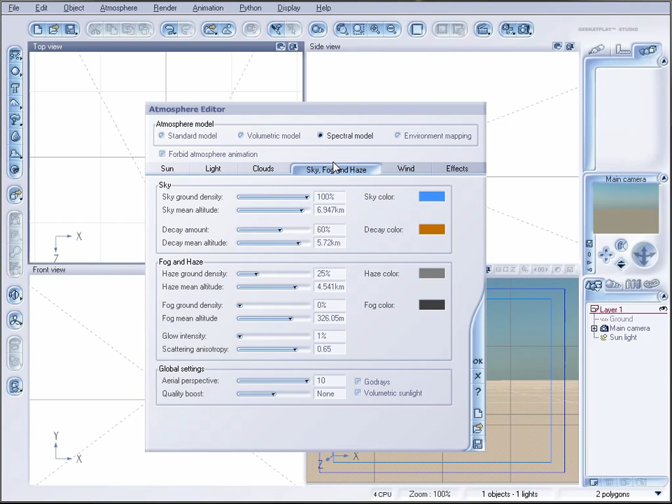In this tutorial we'll look at how to create some nice skies and mostly how to use God rays in creating your skies. This option was available in Vue with the spectral model. If you're using any other model, you won't see these options or the God ray enable checkbox right here. So if you want to use this, switch to the spectral model.

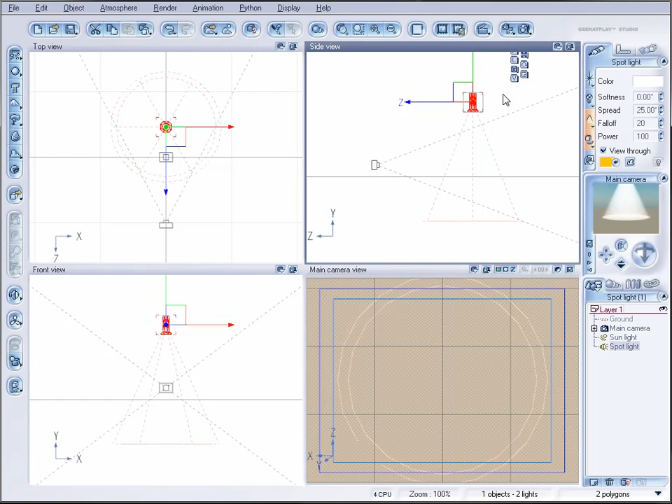What it actually does is apply volumetric lights from the sun, so you can see lines going, similar to what we've seen before. If we create one light spot right here and enable volumetric light, you can see the cone of light coming from this light. Similar technology is used applying directional light from the sun, and all the environment affects this light too.

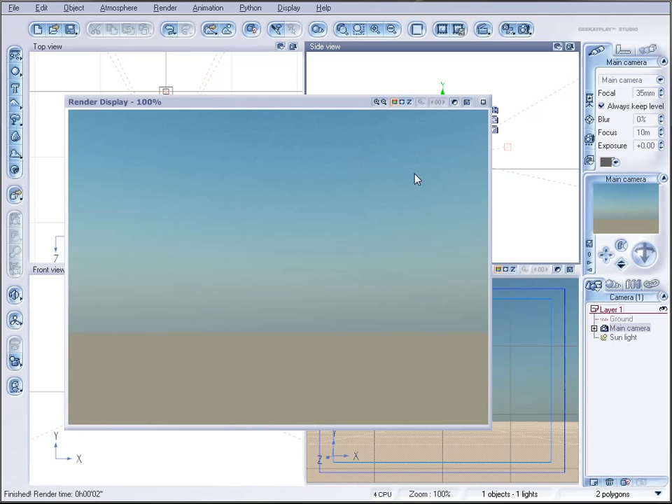Let's move our camera slightly up so we can see more sky. If we render right now, this is our normal sky. Now we'll go to the atmosphere editor and enable God rays. Let's render right now - you don't see any difference, because it applies to all the sky and we cannot see the difference between where the sky is covered or not.

To make them visible, we need to add clouds. You can select any cloud, update them, place these guys, and now if you render you can see some effect, but they're hardly visible because we need to increase contrast.

Here's a couple interesting tips. Let's add one sky and load clouds - I'll try to find one so I can show you. The one thing you want to be sure of is having shadow density enabled, which will add the effect. To do this, double click or right click on your window where you have clouds, select edit, and check the cast shadows box, so you can see how it's already affecting our preview.

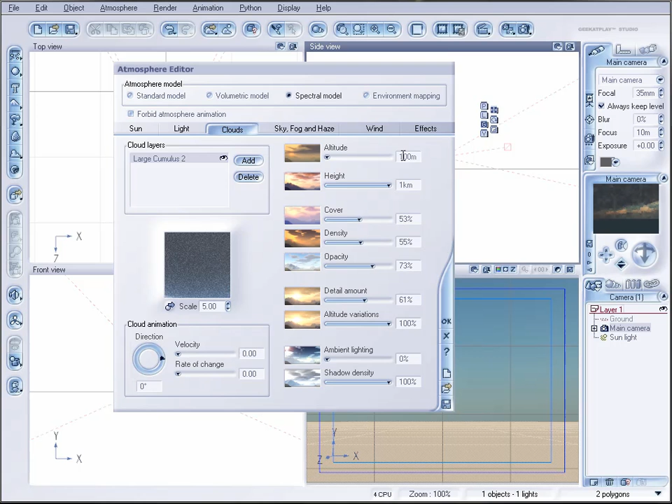Also, increasing the amount of cover if you need it, and altitude will affect things too. Mostly what altitude affects is how long the streak will be from a given location. For example, if we go look again at the atmosphere editor and we see 100 meters, our lights will go from 100 meters to the ground.

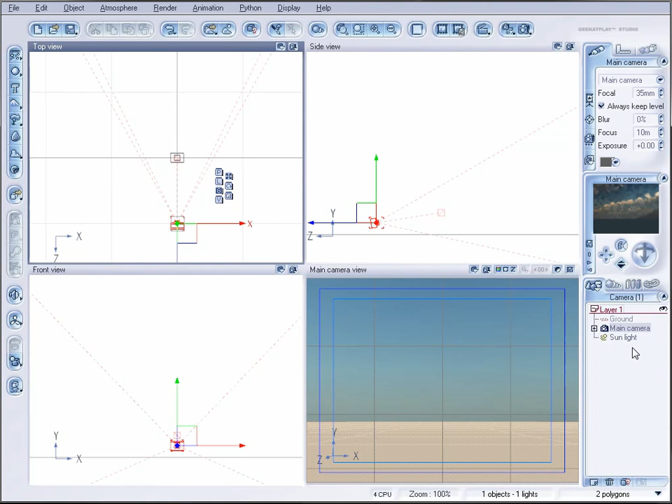If you want a longer strike, you need to increase it, go a little bit higher. If you do this, you will see the light strikes, but they're not very big or very wowy or nice looking. Here's a couple things to make them look better.

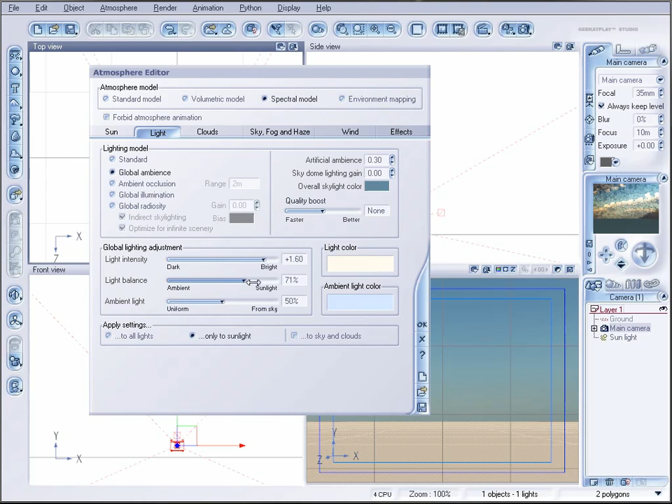One, go to the atmosphere lighting tab and increase light intensity - that will increase overall lights, but it also adds to the sunlight, and the strikes become much more visible. Be sure if you do this, you adjust your ambient light or others, so you won't have it overwhelmed with the lighting on your model.

Also, you can decrease ambient light just slightly, so our clouds will pop up even darker. And if you have darker clouds, comparing the contrast, you can see the streaks a little bit better.

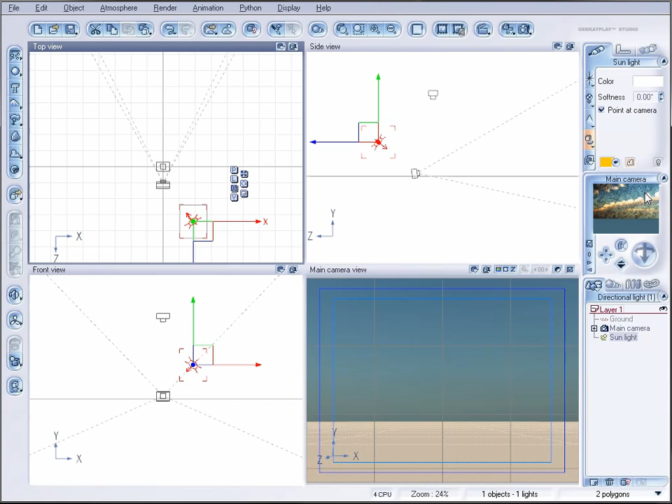Other things also - position of the sun matters. If the sun is going behind the camera, you can still see the strikes, but they're not as impressive as if you take it from the camera and move maybe to the side of the camera, a little up and to the front. In this case you'll have lights going more visible and they'll give you a better effect.

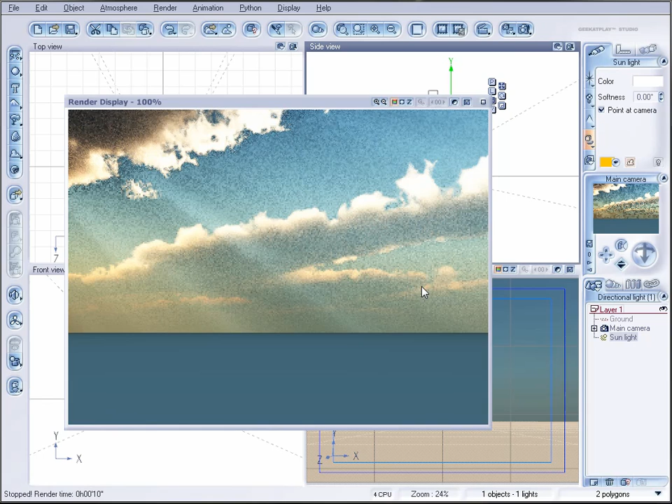Other things also - if you notice, using God rays we have a lot of grain now on our sky. Let's move it up - you can see how there's grain on our clouds and overall sky. The grains start to pop up and it doesn't look very nice, so we need to add a little bit more smoothness to this.

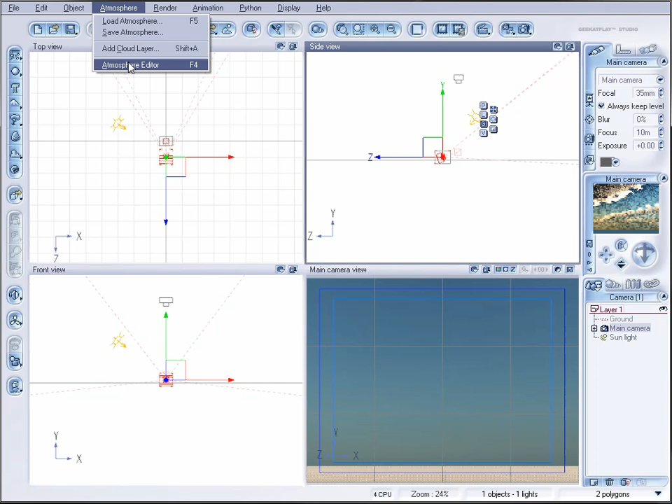To do this, we go to Atmosphere Editor, Sky, Fog and Haze tab, and we need to increase the Quality Boost. You can even go up to 4, or go inside and just type a value. If we go up to position 8, you can see at this point - and remember, we're in preview mode, so when we switch to the final render, we'll have even better quality.

Okay, and here we're not even finished rendering, it takes a bit longer time, but you can see the quality grains start disappearing and we have a much clearer look. Again, the price for this is it takes very long time to render, so the quality comes with the price of time.

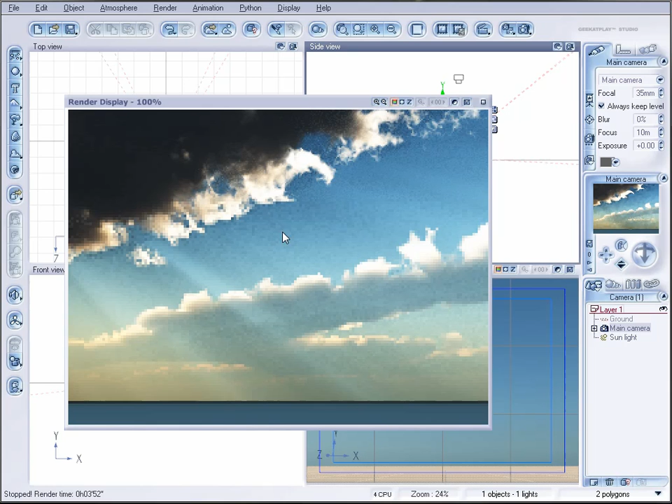Also, to make strikes of the sun more visible, you want to decrease and make the gaps between clouds smaller, so the contrast is higher. And again, you're going to Atmosphere Editor, go to the clouds, and can increase the cover overall for your sky.

So you can decrease, and you can see on the little preview we have already very beautiful God rays going through the sky, like on this one example.

Okay, and you know what, let's do a couple things. Let's set it back to 0, so we have faster render time. And in the preview you can see already we have nice God rays coming from the sky.

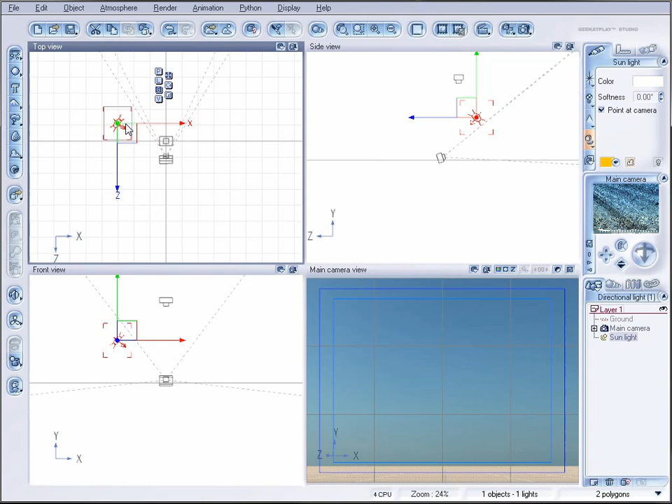Again, we build the kind of contrast between all of those. Other things, okay, let's delete this cloud. You can take low clouds, and positioning of the sun is actually very important, same as altitude. So if we put it at very high altitude on this one, we'll take our sun and put it maybe just on the back, around here.

Maybe going to Atmosphere Editor. Let's go to the sun. Increase slightly.

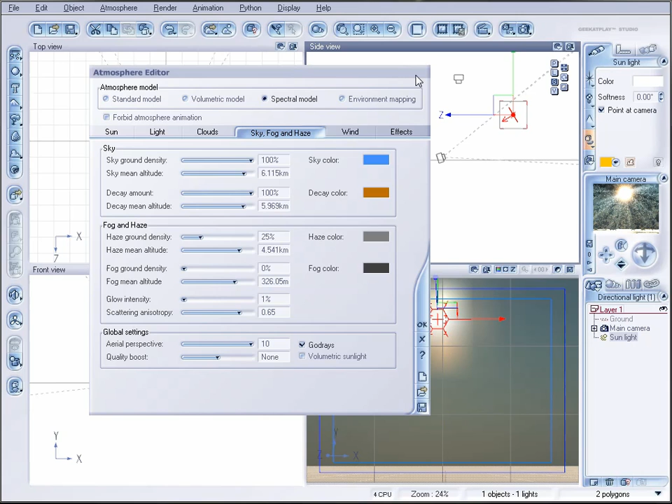So you can create very interesting effects. And again, what we're doing right now is trying to create a lot of interesting God rays coming from our sun, which is ahead. And because we have very high clouds with small openings, the God rays represent very well in this shot.

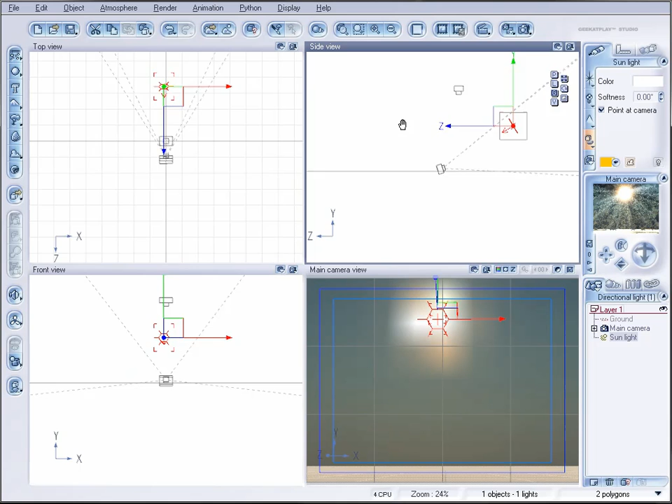Okay, and overall, again, an overview of how to make God rays work better for you. Be sure your sun is positioned up front of the camera, even if it's not visible, it will make it appear better in the lights.

Also, in atmosphere editing, it does help if you have shadow enabled at maximum, it will increase contrast on your clouds. You can see the example, you almost cannot see it here at all. Also, if you set your ambient lights on your clouds darker, you can increase contrast. Overall, it's increasing contrast between clouds and the outside light.

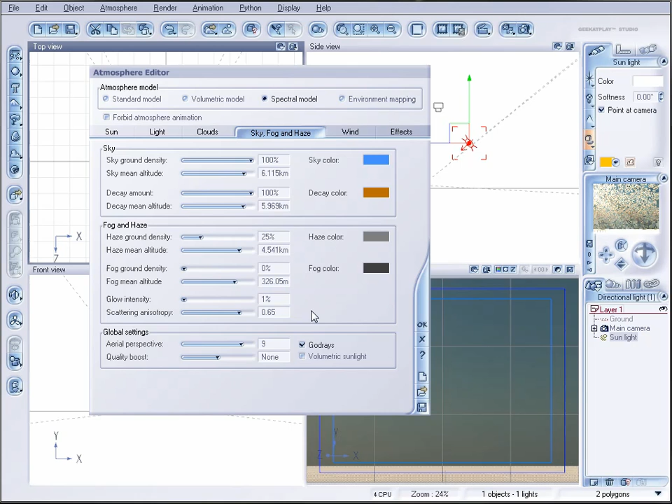Detail amount will help you create smaller or other strikes, and with cover you can control how many of the stripes you want. Density, you probably want it at a higher level if you want to apply darker clouds. As well, with your aerial perspective, you can give some additional effect. And again, with aerial perspective you want it higher, you can just type in, so you have a different position as well.

Okay, and you know what, let's create one scenery with maybe God rays. Let's take our sun like on this side.

Okay, let's go to Atmosphere Editor, go to the clouds, you can increase a little bit higher, so we have a nicer look right there. Cover, add a little bit more. You can add details if you want.

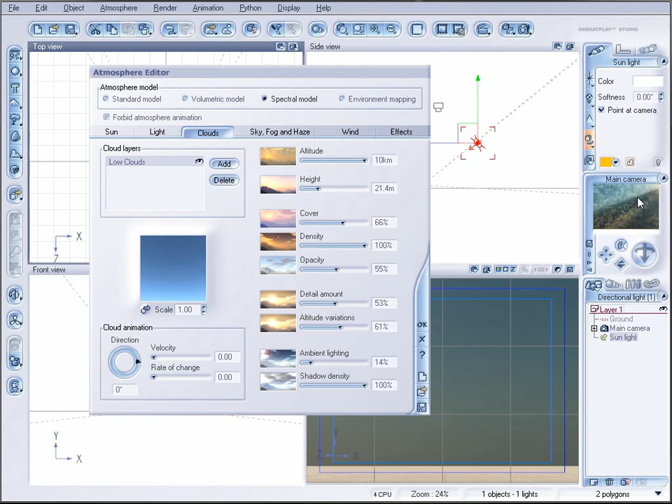Again, many times you'll start with settings, apply settings on the cloud, and you can see in your preview how well it will work for you. In this case, we'll just preset some around here. Let's increase a little bit of quality. I don't want to spend too much time.

The volumetric sunlight mostly doesn't do anything. Same as your glow intensity, it will maybe smooth a little bit of some grain, but it won't affect the God ray that much. And as well, the haze overall won't affect it either. Actually, probably if you go down, it will have a little bit sharper look.

Okay, let's render the final for this one and see our image.